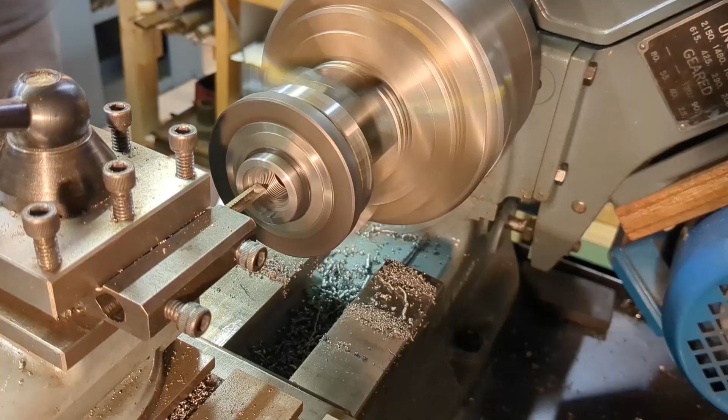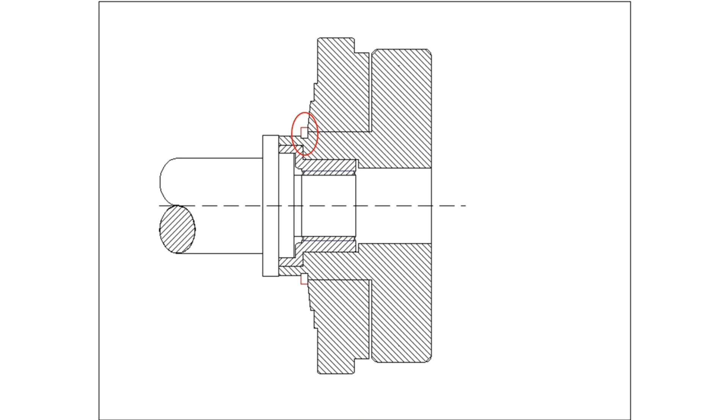So it's finally time to bite the bullet and machine out the M14 thread in my new chuck. Before doing that, I produced a drawing so I knew just how much material I had to play with, and you can see how close the circlip is to the bore of the chuck as I prepared it for inserting the bush. Here you see the bush in its finished state, but of course it was produced as a blank, inserted in the chuck and then machined in position.

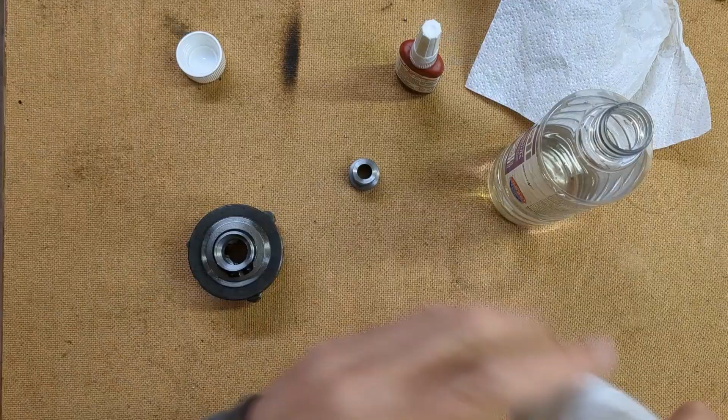So we're ready to join the two parts together. The bush is ready and the chuck is bored out to size. I've left a clearance of 2 thou on the perimeter on both this diameter and that diameter, so we get a good bond between the two.

I didn't want to take away too much material, but I wanted sufficient material in the bush to turn the thread and make up the register. So that was a bit of a compromise, but I think I've got that about right. So we're ready now to bond these two together.

Okay, we'll leave that, go and have a cup of tea and come back later.

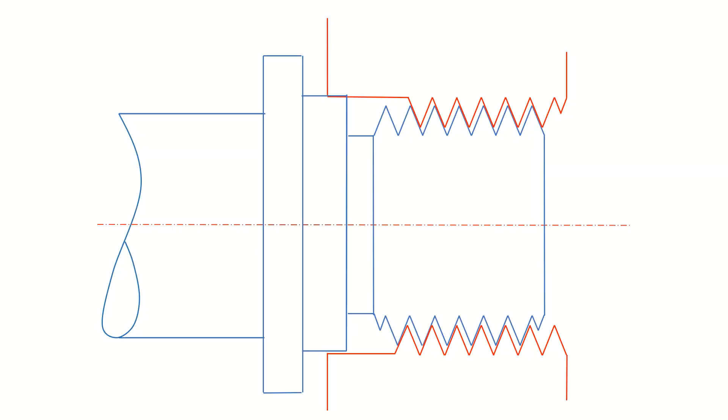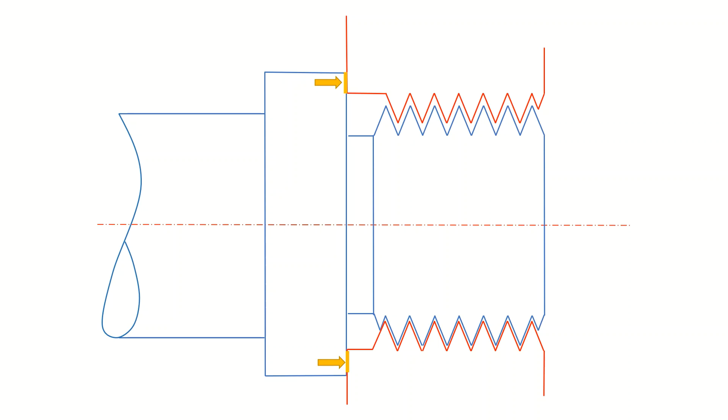Between any two screw threads there's normally going to be a small amount of clearance, meaning your lathe backplate or faceplate can rock slightly on the thread, like this. That's the situation I encounter when I screw my lathe chuck onto the mandrel before it seats home - there is indeed a small amount of clearance. Even when it's brought up against the face, there can still be a small amount of radial malalignment due to the clearance in the thread, like this.

To get around that, the designers have used this location diameter, which provides radial alignment, and then as the feature is screwed home, it butts up against the shoulder, ensuring axial alignment, so there's no run out on the face of the chuck or faceplate. That's the design I've opted for.

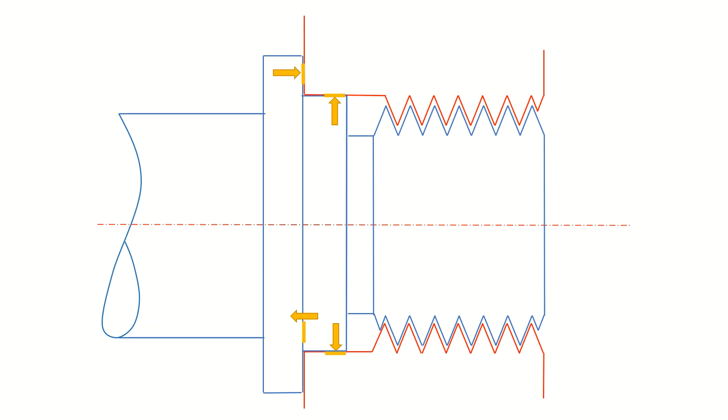I suspect you can achieve both radial and axial alignment with high quality threads, but I don't think I can. So the way I'm going to mount the chuck for boring the register and cutting the M14 thread is to turn a stub mandrel in the lathe here, just tidy this up, and then mount the chuck in reverse.

If I machine this out, that should mean that when I take this off and mount it on the lathe, for that diameter at least, it should be running concentric.

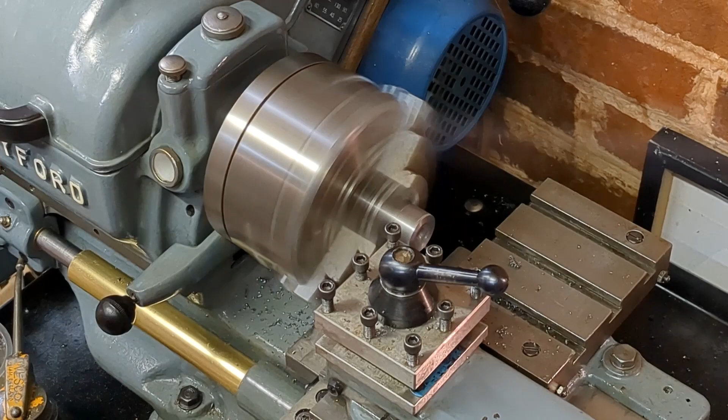I'm now mounting the chuck on the turned portion of the mandrel, so we know that's running true. You'll see I'm actually going to tighten up at all 3 points around the circumference. I used to think it made no difference on the scroll chuck, and that wasn't necessary. But I have found it does make a small difference, and it provides that extra guarantee that the jaws are going to seat properly on the work.

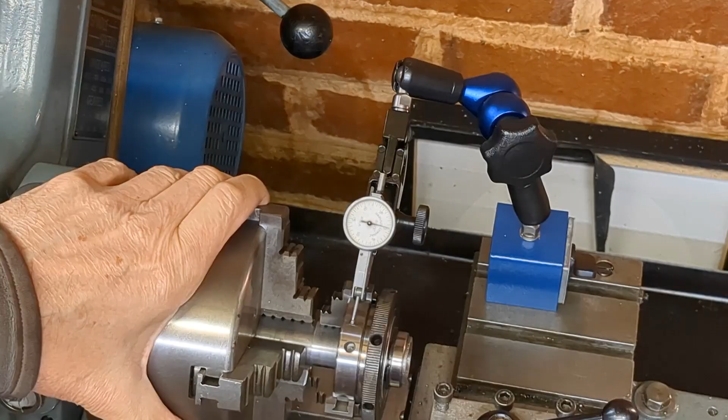Just going to zero out the clock here, and then we have to negotiate the jaws using the cross slide to bring the clock back onto near the perimeter, and we can see that there is indeed run out there. You may not be able to see it on camera, but that looks to me around about 3 thou of run out on the face of the chuck.

Just go back to the starting point and we come back to zero. So we can't do much about that. I'm not primarily concerned about the body of the chuck. What I'm concerned about is the faces of the jaws as they grip the work, that they grip the work concentrically and square with the axis of the lathe.

Okay, I'm going to start by just removing this excess material. What we'll do is face this eventually so that the original chuck material on the boss and our bush just form one surface. So we'll just face that back and do the finishing later.

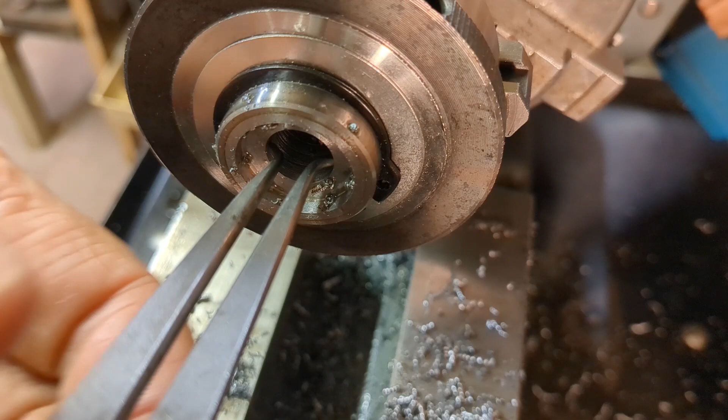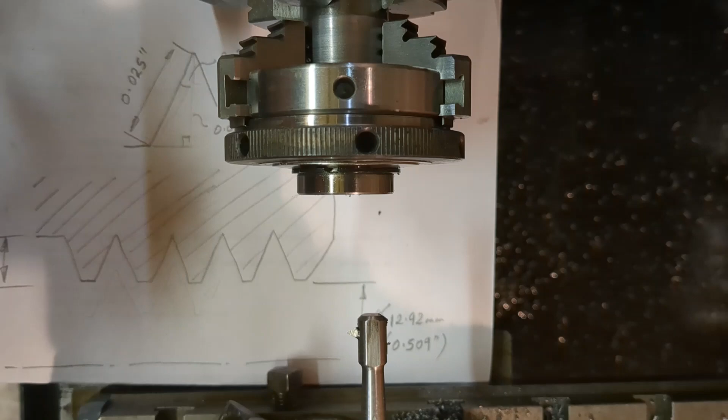I very carefully ground my tool, and I'm using the boring tool which I just made. It was made from silver steel, or drill rod, and the reason I did that was to gain rigidity by having something a little bit more rigid than simple mild steel, and it's tapered so that again it increases the rigidity, yet small enough to get into this approximately half inch hole.

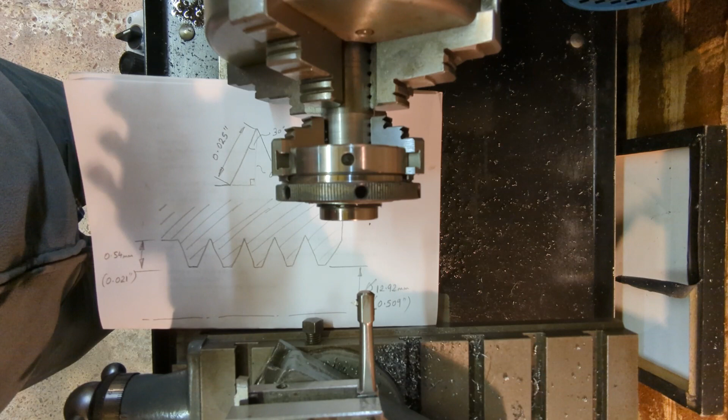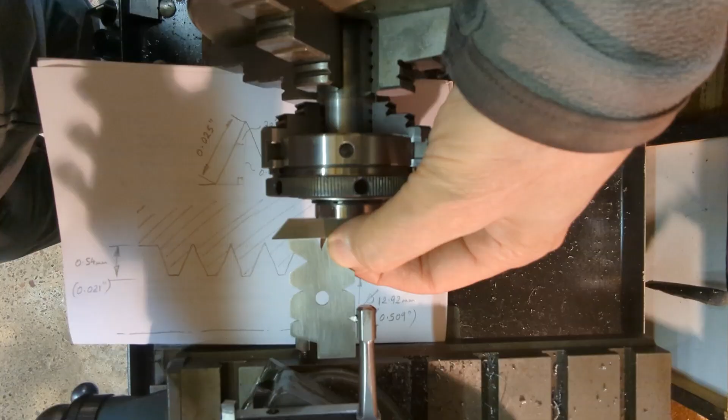So we need to make sure the tool is set up correctly. It's a bit fiddly, this. I'm using the boss on the chuck here just to align my threading gauge, and we've got the 60-degree angle there, and I've got some white paper underneath, just making sure that this cutting surface on the left hand side is aligned with the angle in that V - you may not be able to see that. Let's zoom in a bit, see if you can. Try and swing this down a bit.

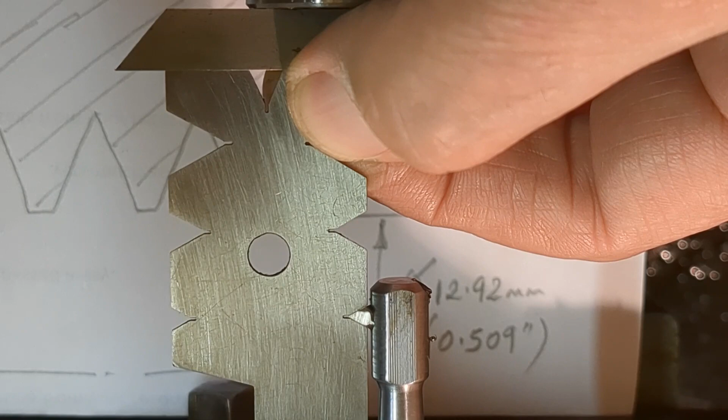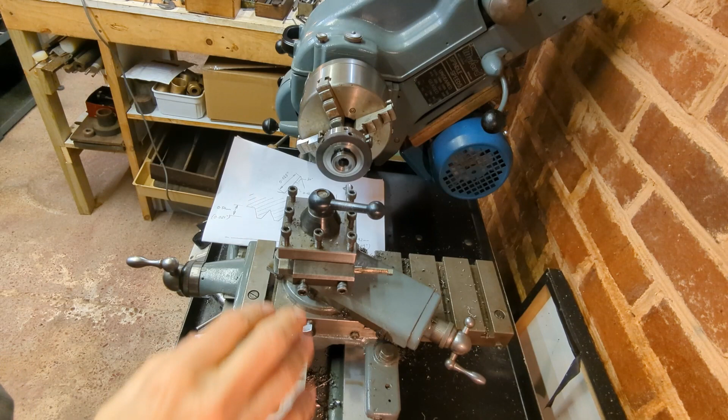Okay, that's lined up, so I'll just lock the tool holder in position. Let's take a closer look at the setup from further away. So you can see I've set the top slide round to advance from the rear of the lathe at half the angle, 30 degrees.

Perhaps it's more usual to have the cross slide at this angle, so then you'd be advancing a cut by coming out, traversing out in this direction. The reason I don't do that is because you then have the cutting forces in a different direction to the drag on the saddle, and there's a possibility that your cutting forces are greater than the drag on the saddle, meaning it's actually going to push the work forward as it cuts and run ahead of the lead in the lead screw. I like to do it this way so that the cutting forces and the natural resistance of the mechanism are all in the same direction, so you know exactly where you are.

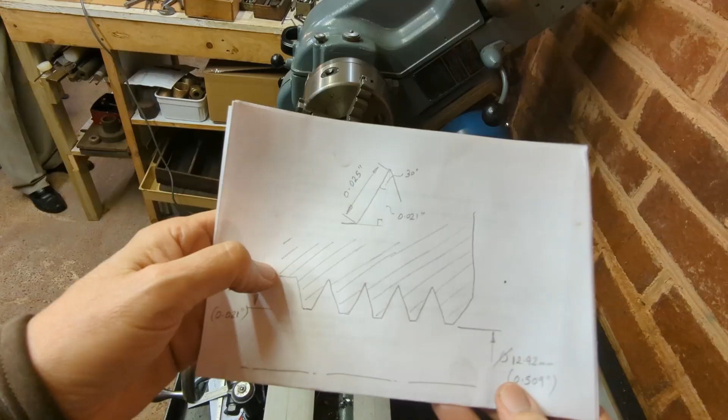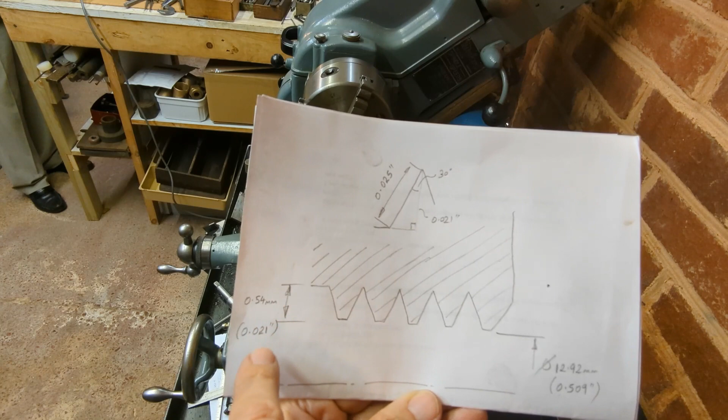So I've looked up some tables for this M14 thread, and the minor diameter is 0.509 inches, which I've already turned to size - that's 12.92 millimeters. The depth of the internal thread is 0.54 millimeters, that's 21 thou. If we resolve that into the angle on the top slide at 30 degrees, that works out at 25 thou. So we'll be advancing the top slide by 25 thou to bring us to full depth of cut.

But when we get to about 20, I'm going to start trying the mandrel with a male thread, using that as a test piece, and hopefully we can get a nice fit.

Because I'm cutting a metric thread on my imperial lathe, I can't disengage the clasp nut, so I'm just reversing the lathe to bring it back to the start position.

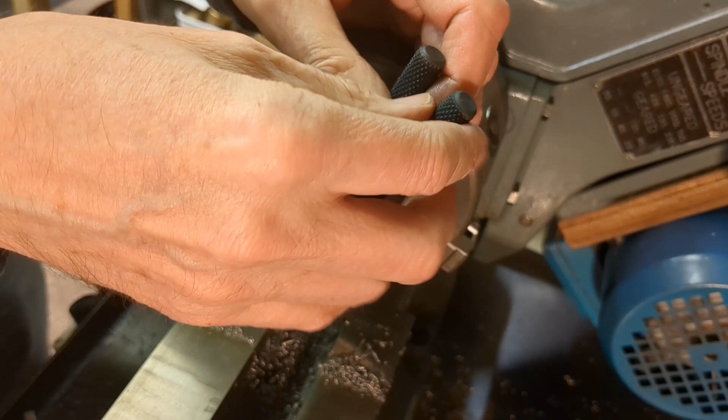Before I go any further, I need to clean up the chuck - there's a lot of swarf trapped inside there. What I'm going to do is, as I remove each of the jaws, put pop marks around the circumference so I can put the jaws back in exactly the same place. There's no other identification on the chuck body, and that will give me more chance of getting repeatability in the way it grips the work and hopefully provides concentricity.

So we'll do that, and that will also involve removing the circlip on the back to separate this ring with the scroll on it from the body.

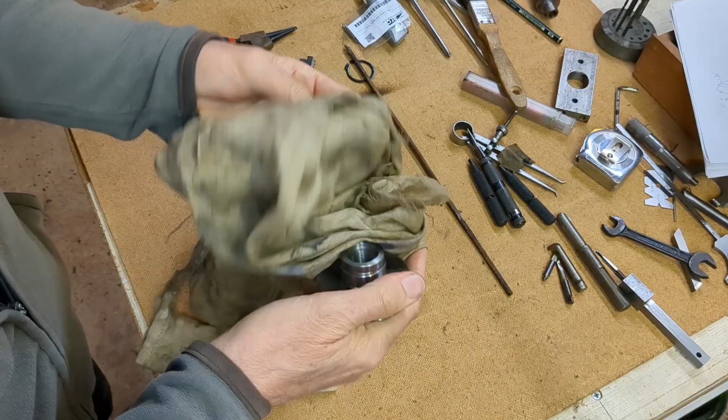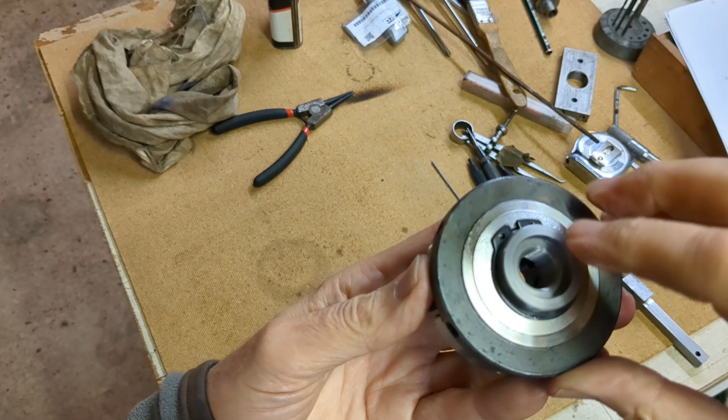So let's take a closer look at the completed chuck. You can see the register here, and just about see the demarcation line between the original material of the chuck and the bush. That will be part of the register - the face, which provides alignment, and the internal diameter, which provides the radial location. You can see the M14 thread. I'm very pleased with that. The surface finish is good, and it's a good fit on the mandrel.

And as we look around the circumference, you can see the marks I put in there to identify each of the positions of the jaws, so we've got repeatability. So what we need to do now is take this over to the lathe, reinstall the mandrel, and then machine...

the register on the mandrel, this diameter here, so that it's a nice tight fit on the internal diameter in the chuck. At the moment, of course, it won't screw up because it's a few thou too big. At the same time, I'll also just skim this face here to make sure everything is finally square.

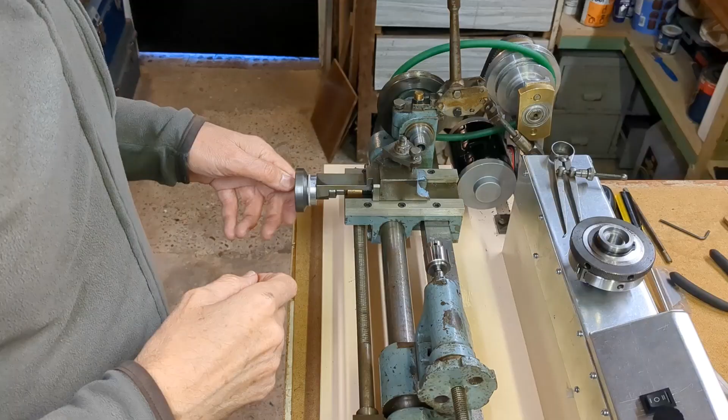Okay, I've reinstalled the mandrel, relubricated it, and we're ready just to turn this down. I've measured this and it's a touch over 0.825, and the register here is about 0.819. So it's just over 6 thou to be taken off this register. We'll go ever so carefully and hopefully get a nice fit.

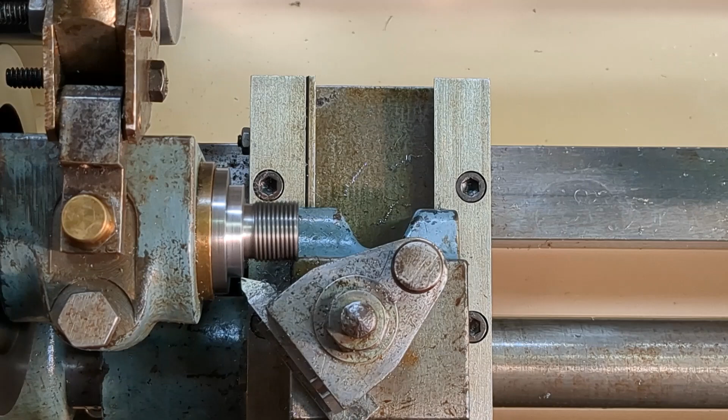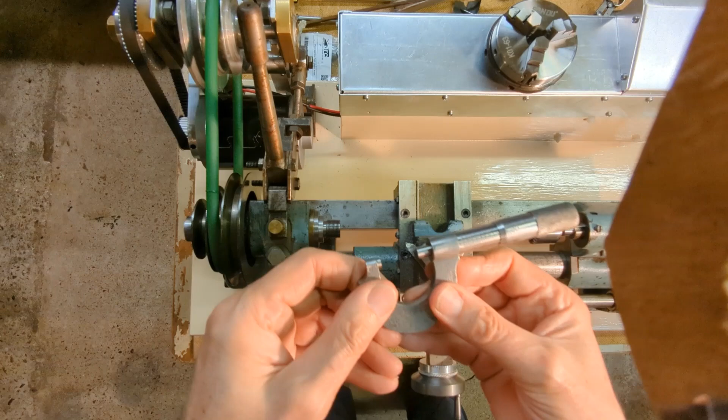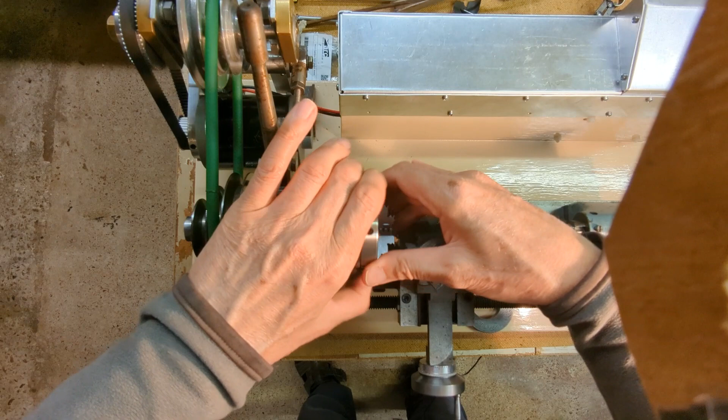0.819 should fit. Not quite, because I could be a bit out there on my internal caliper measurement. I'll double check that and then come back and see how much I'm going to take off next time.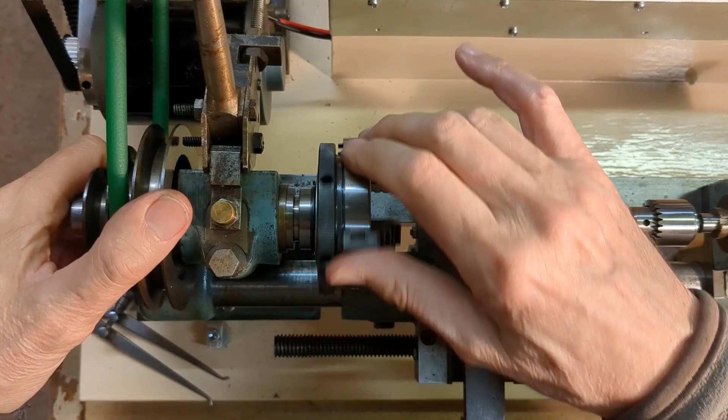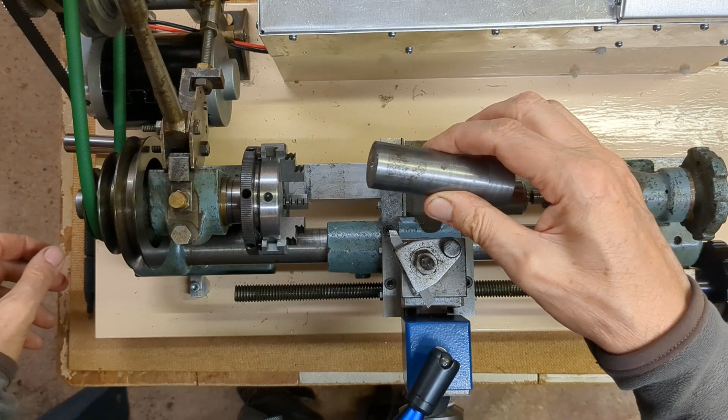So we'll test the runout now of the chuck. I've got the same stub arbor that I used in the other lathe. This time, however, I'm going to dispense with this portion because that contains the inaccuracies or potential inaccuracies of the other chuck. So we'll just chuck up on the plain portion.

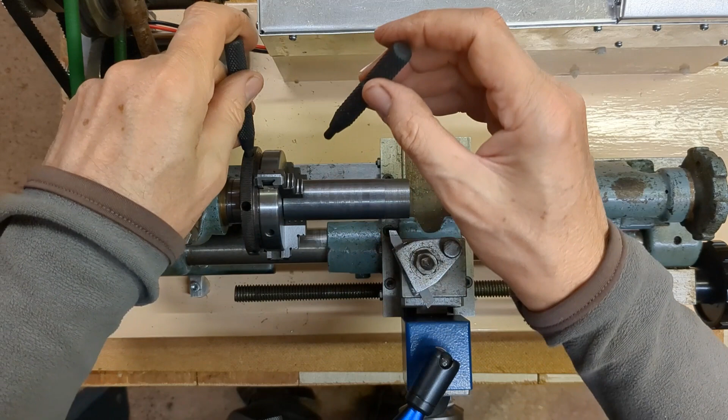And I'm going to carefully go around the circumference and tighten up at all 3 points to give it the best chance of bedding in properly.

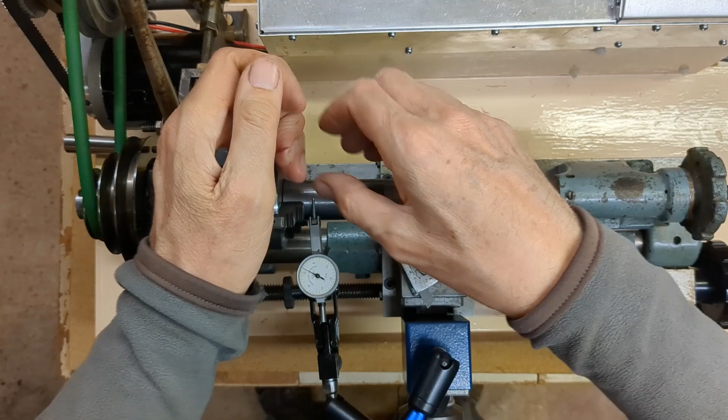I'll try that again. I think part of the issue here is that the work is quite heavy for this little setup, so there's a tendency for the work to drop if it's not supported. So let's just try again.

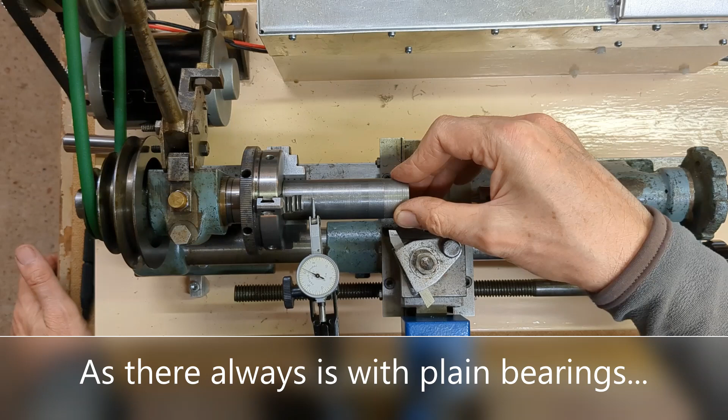Okay, that's more like what I saw before - around about 1.5 thou. The other question you might have is why I'm doing this under power and not by hand. What I've found is that because there's a small amount of clearance in these bearings, you don't get the hydrodynamic effect of the bearing being properly supported until it's actually rotating. So that's why I'm testing this under power but very slowly.

And we'll test the runout along the length. Well, it's getting worse, as you can see there, up to about 5 thou at roughly 1/3 of the working length of the lathe.

We'll try now with a smaller bar. This time I'm using a 5/8 test bar. I guess this is more the typical size that I would want to chuck up in this little lathe. That 1-inch bar is probably a bit on the large side. Let's try that.

So at the headstock end we've got around about 2 thou, and that's progressively opening up to 5. Yeah, not really as good as I'd hoped. That's puzzling to me. One possibility is that as I'm tightening the jaws up, the chuck is actually distorting slightly. Be interested to know if anyone else has had a similar experience with this kind of chuck.

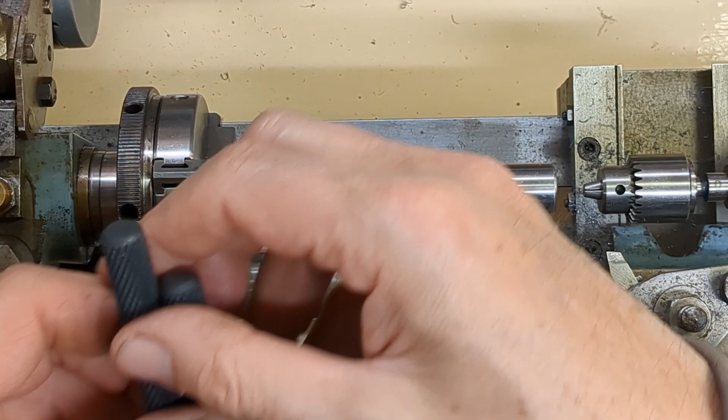Anyway, that's where we've got to. Perhaps for more accurate work I'm going to have to make a little setup with collets, if that's what I want to use the lathe for in the future.

I purchased this little 0.3 to 4mm tailstock chuck with a JT0 taper and a 0 Morse taper arbor. So I'm set up now for tailstock drilling. I think at this stage, I should have taken that out earlier.

I think this is time to stand back and think about the project. What I'd like to do is use the lathe and see what other limitations there are.

Well, for the time being, that concludes this series on the mini lathe. The next project is going to be this Adcock and Shipley mill, which I just purchased. I had to dismantle it to bring it here, and the parts are spread out all over the workshop, even behind the camera. So I'm going to be renovating this, putting it back together. It's actually in good condition - I just tested the motor's working all right.